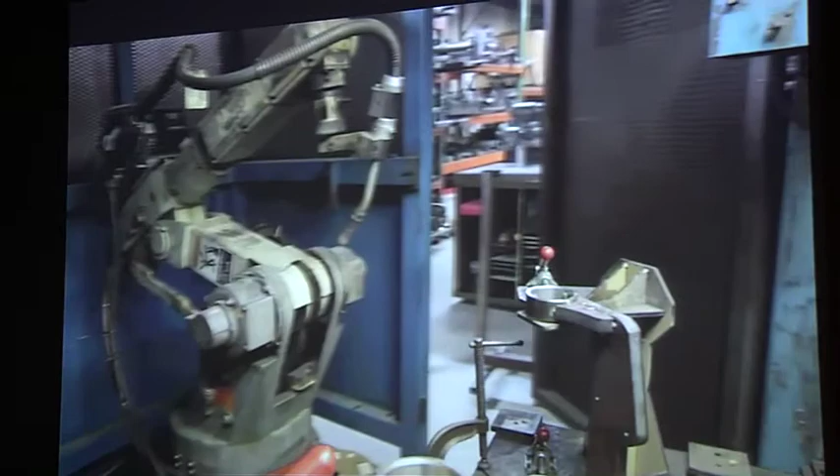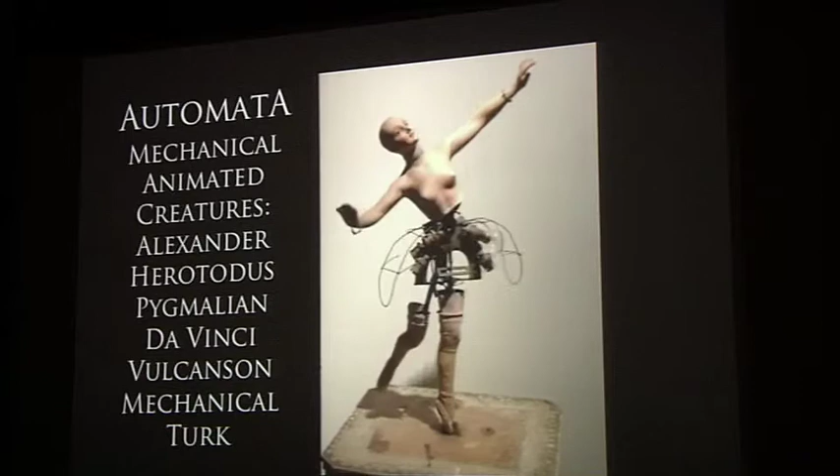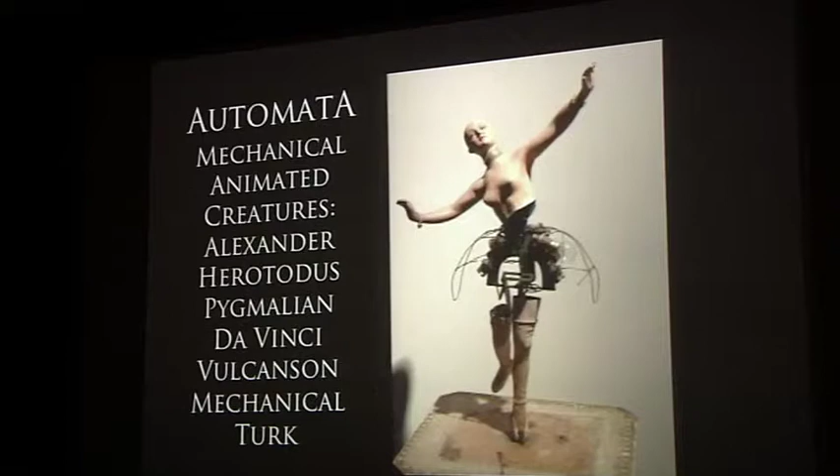Okay, great. So those are all three classes of robots, and the history of robotics goes back quite a long time. The idea of automata really goes back to the ancients, to the Egyptians, the Greeks. Da Vinci had a robot, Vulcanson, and the Mechanical Turk, a chess-playing robot, although it turned out to be a fake. So there's a long history, and what's interesting is that they're all mechanical devices, beautiful pieces of engineering involving complex systems of gears and levers and cams, basically very complex, like clockwork, to do interesting things.

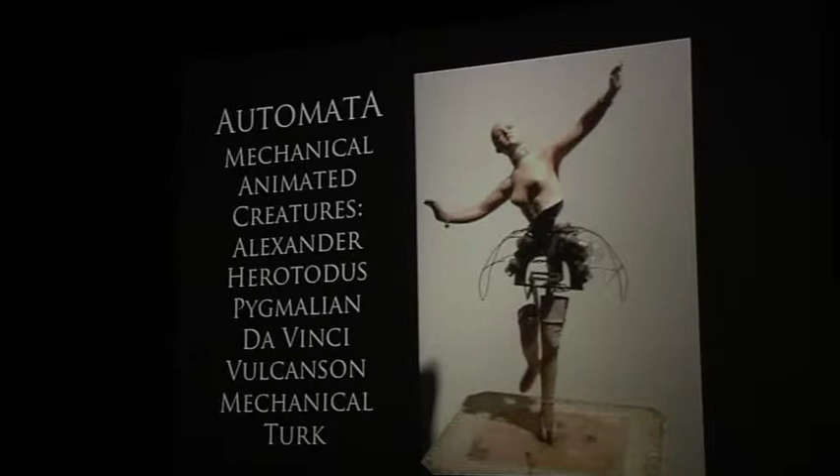One of the ideas is that it plays into this concept of hubris, that in some way to take on a godlike quality of making other beings, we're going to be punished for that. And so the idea of robots has this really complex dark history, at least in Western culture.

And the term itself, the term robot, didn't emerge until 1920, and it came out of Czechoslovakia. A Czech playwright named Karel Čapek used it in a play called Rossum's Universal Robots, RUR. And it was also in the Frankenstein category, because the robots revolted and attacked the humans.

It's interesting that the word itself comes from the Slavic root 'robota,' which also connects to the German 'Arbeit,' the word for work. It's worker, but not necessarily like having fun, off to work we go - it's kind of like forced labor. And you may recognize 'Arbeit macht frei' from the Holocaust, from the concentration camp.

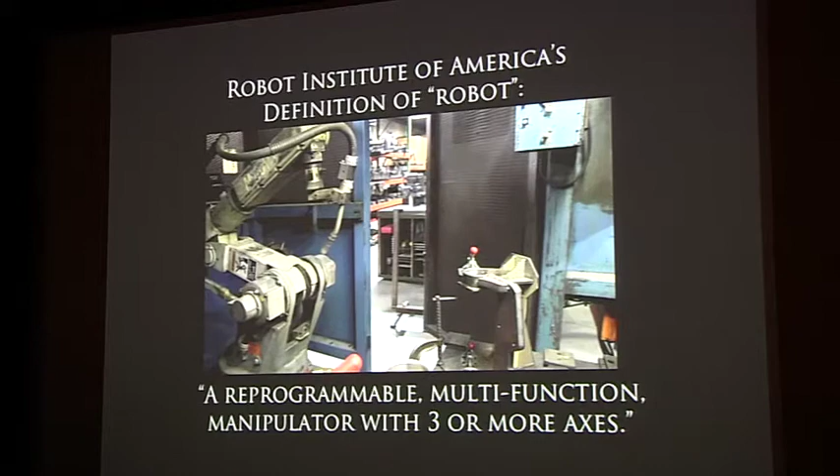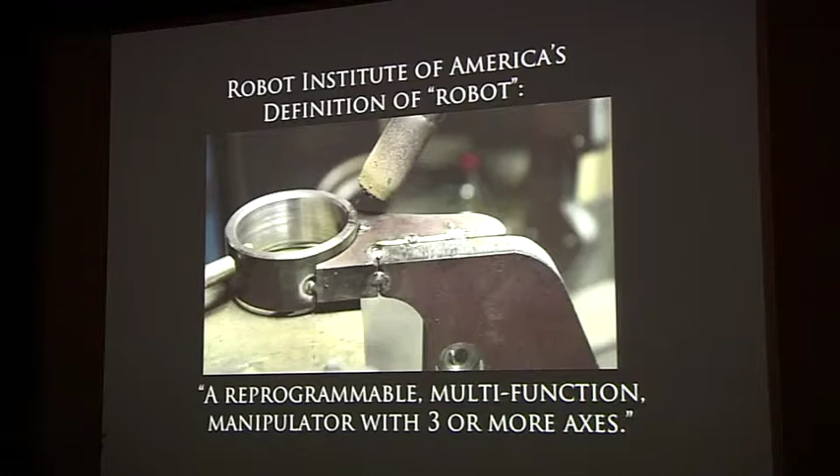Now I want to come back to the official definition of robots. If you go to certain dictionaries and look up robots, or search on the internet, you might see the definition from the Robot Institute of America. They call it a reprogrammable multifunction manipulator with 3 or more axes. They want to make a distinction from really simple things, like a traffic light or a very simple mechanism, saying it's not a robot unless it has 3 or more axes.

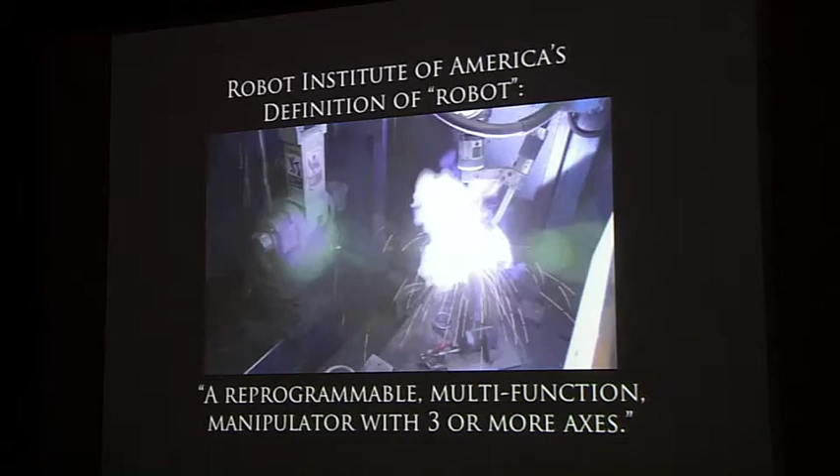But as we've been talking about, there's so much more to the definition than is captured in that. There are multiple classes of robots. One thing we talk about in research is the difference between anthropomorphic and non-anthropomorphic robots. There are many of each type out there.

The distinction we like to make is if you think about trying to build an airplane. For a long time people wanted airplanes that looked like birds, so they would flap. But it turned out the actual solution was not to follow birds exactly, but to have something not bird-like, the fixed-wing plane. Something analogous happens in robotics: maybe the best robot won't necessarily look like a human.

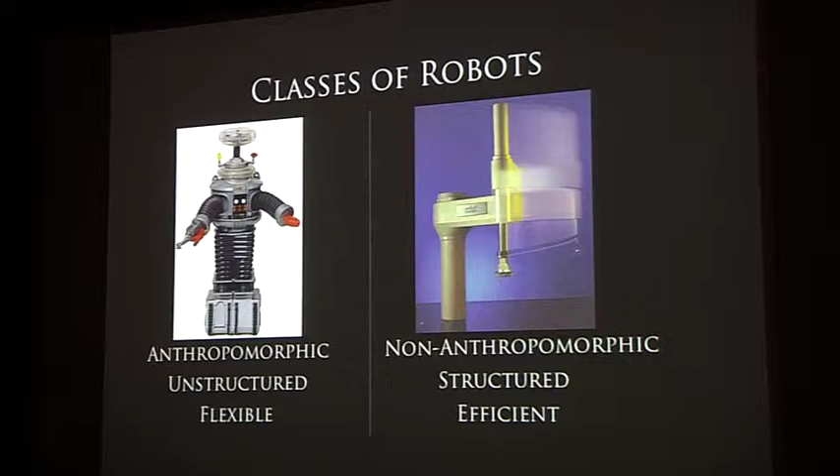The anthropomorphic type, the humanoid androids, are commonly thought of for scenarios where they're going to interact with humans, like in your house, what we call unstructured environments, where we don't know what's going to happen. The other kind is very good for structured environments like factories. On the left side there's an emphasis on flexibility, and on the right side the emphasis is on efficiency.

In the field of robotics there's lots of work going on. If you're interested, we can talk afterward, there are research groups all over the world. I'm very involved with the IEEE Robotics and Automation Society, which has about 6,000 members worldwide, hosts a number of events and conferences, and publishes journals and a magazine covering all these different areas.

What's also interesting about robotics is it's a highly interdisciplinary field. We have people from computer science, mechanical engineering, and industrial engineering all working together. Some of the topics involve a lot of math and theory, because robots are really the intersection between the world of computers, which is digital, and the physical world, which is analog. Robots have to bridge that, requiring techniques from many different areas.

There are a number of different exciting research areas, and this is just a few of them. At the last conference we had over 1,000 papers in over 100 different sessions. There's a lot going on, and I'll try to touch on some of that afterwards.

So now I'm going to stop.

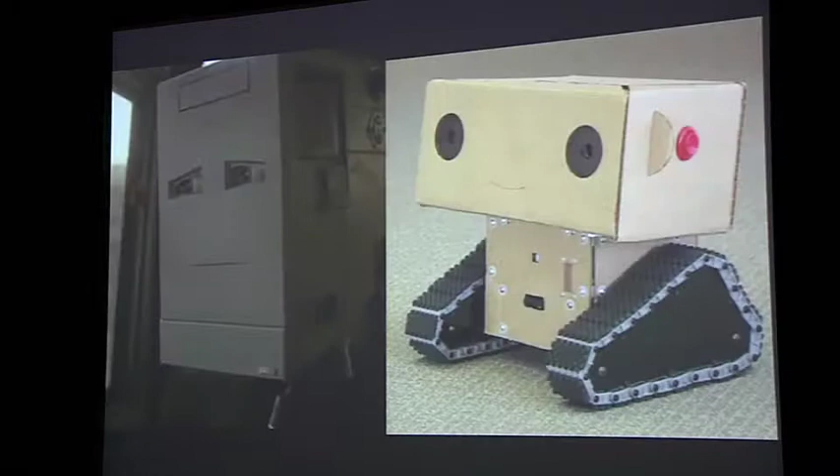This is a project that comes out of the MIT Media Lab. It's called Boxy, so it's a real robot on the right. But notice it has a very nice resemblance to our hero, Sheldon. I'm going to show you a quick video about what Boxy is all about.

I need help. If you can help me, press the red button on the side of my head.

The project is Boxy. It's an agent that we put out to try to gather stories about a particular environment autonomously. That is, we send it out in the beginning of the day, hope that it will find people, and then ask them questions and find out about the environment.

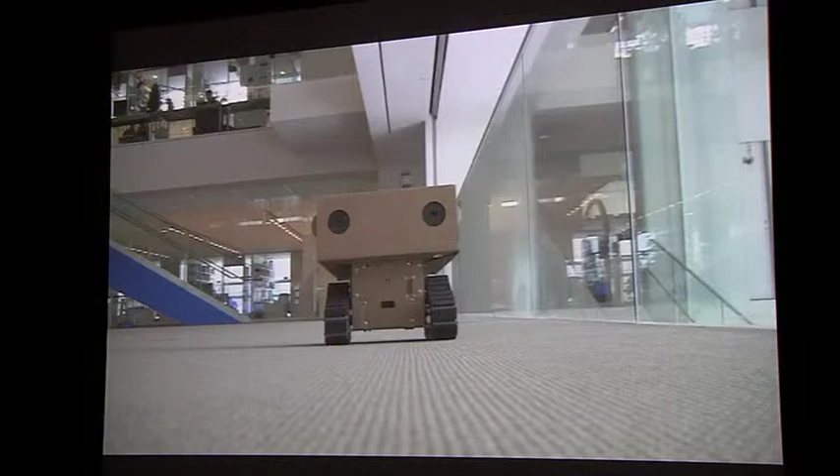Hi, my name is Boxy. I'm from the Media Lab and I'm making a movie about MIT. On the side of my head are buttons, so you can give me instructions if you would like to be part of the movie.

Actually, what I just want to say really quickly about that is Boxy is a robot, but it's designed to be a robot that's very empathetic, that people will be empathetic to. So they'll talk to it, they'll start to interact with it, and then it's there to collect video, and people pick it up and move it around. And it's part of his master's thesis.

So it's a beautiful piece of actual engineering and science that came out of a very independent source. I don't think that Alexander Reben knew about this film, and I don't think Spike Jonze knew about Alexander Reben. I think they were independent, but they both were thinking along similar lines, if that was a robot that you could empathize with.

Okay, so now I want to talk about the scene in the film when the woman yells at him and says, 'You can't drive.' Remember that? When he's at the bus stop and she says, 'You can't drive,' that classic woman, 'You can't drive.'

But how many of you know about the Google project, Google car? There's actually a very active research project to do exactly this. Actually, it's been going on for 20 years or more. People have been trying to get robots to drive on highways and streets.

What's particularly interesting about this project, Google's version, which is very successful actually, is that it makes use of the internet. It makes use of vast amounts of data on roads, a lot of which is available online, and then uses that and integrates that when it makes decisions. So when it's driving around, it's not just looking out cold, it has maps and GPS and vast amounts of information that it's bringing to bear to help it drive accurately.

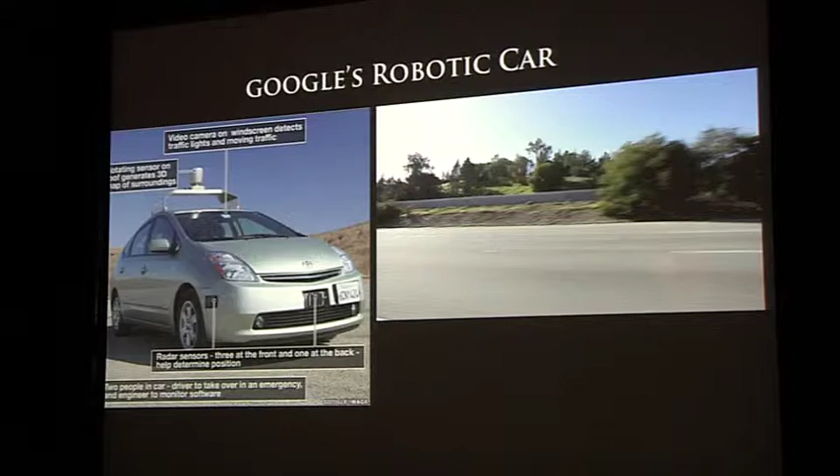So this is a subset of what I call cloud robotics, and it's a very exciting new sub-area. There's a nice quote I just heard about the car project, this Google car project, and it was Brad Templeton said, 'A robot will be truly autonomous when you instruct it to go to work and it decides to go to the beach instead.'

So I like that. But the bigger part of this, and I'll talk about for about 10 more minutes now, is called cloud robotics. There's groups at Google and in Europe, a number of researchers are looking into this. And here's the idea: the cloud being the internet. How do we start to think about the cloud as a resource for robots?

As Steve Cousins, who's a CEO of a robot company, said, the way to think about this in a nutshell is no robot is an island. For many years in robotics, we've been building these autonomous creatures that were self-contained. They had processors and everything else, but we're just now starting to realize, wait a second, the robot doesn't have to do all the computing on board. It can actually make use of this vast resource that we all use.

So let's say we want to do something like this. You know, you've seen the Roomba, the most successful robot ever—5 million Roombas have been sold. They do something very well, which is sweep the floor. But what if we wanted to go a step further? We want to have Roombas go and actually do more chores around the house, like actually pick things up, tidy up a room. Well, then it gets more complicated because you really have to do lots more sensing and decision making, so things get tricky.

So it turns out that we can start thinking about the cloud as a resource. The web is very powerful because people are putting up all kinds of information. They're volunteering information. They're helping us by putting up vast amounts of images and databases and tagging images.

Without going into all the detail, this is a representation of all the uncertainty in the edges and vertices of the part, and these are different approach directions that the gripper can take and their probability of success. I'll give you a little bit of a description of this - there's a paper being published in May that we're presenting on this project.

How many science geeks do we have out here? How many people are really into the science part? Okay, came here for the science. Good, alright, so I want to make sure I give you something too.

So here's the idea: there are Gaussian distributions around each of the vertices and the center of mass. That's a representation of our uncertainty.

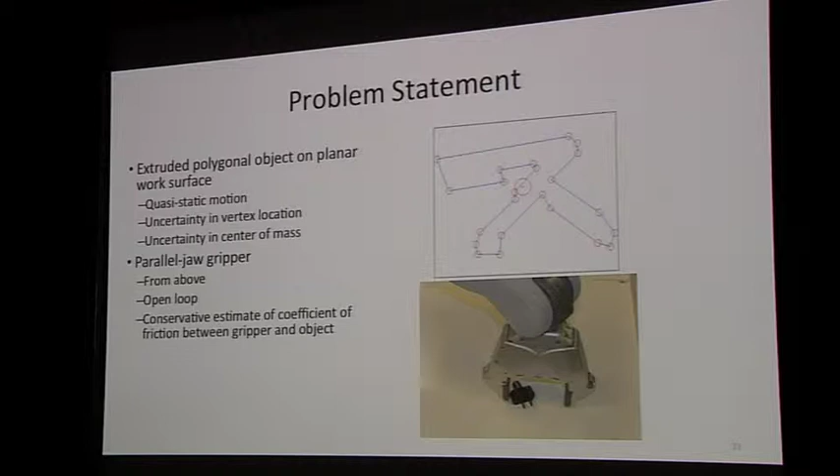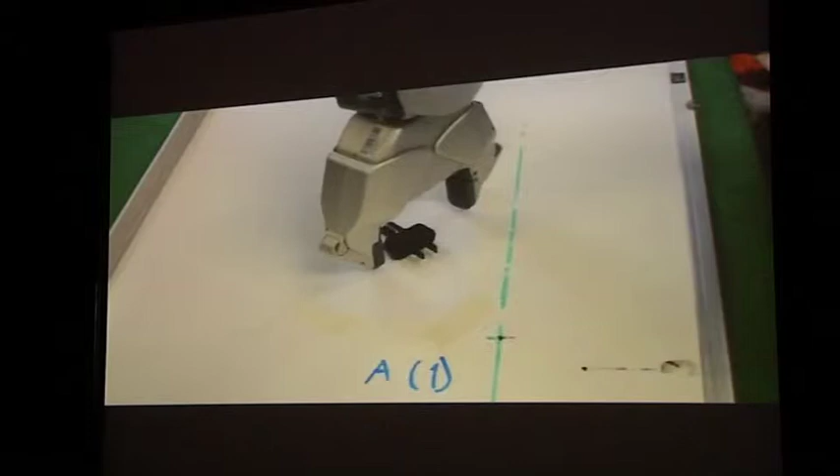Then what we want to do is basically compute a grip. We're going to use a simple grip called the parallel jaw gripper, very common - two jaws that push the part and then close around it, in that sequence as you see there. We want to compute the optimal pushing direction and closing direction for the grippers. Here's an example of what it looks like on a robot in our lab, pushing and closing around this part.

It turns out we can characterize the success of a particular grasp direction and approach direction geometrically. We can look at the properties of its friction and its torques, and basically what's called the force closure - whether we will successfully grasp the part. We can represent this mechanically as a point in this configuration space. Then what we want to do is check for all kinds of different possible approach directions.

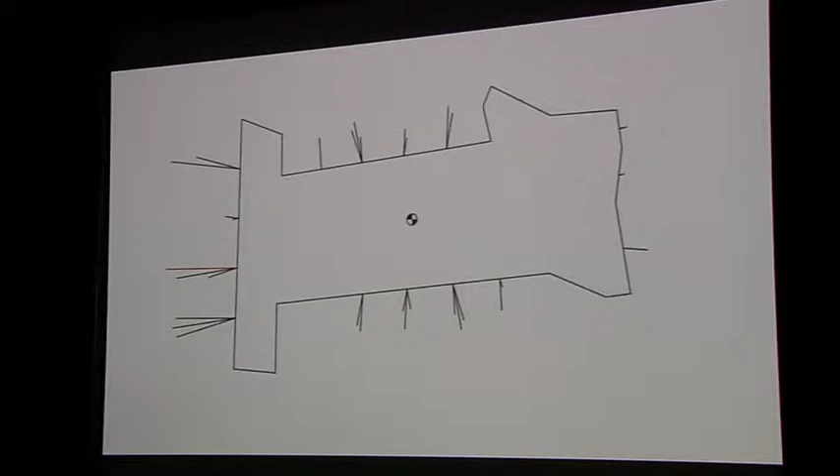We check that against samples of what the part shape might really be. The problem is there are a lot of samples, so that's where the cloud comes in, because we want to do this in parallel. We take one example, send it out to the cloud where thousands of computers can all process it in parallel. Each one sends their report, and we add those up to come up with an estimated probability, or lower bound on the probability of success, for a particular approach direction. This is the result - it's been computed for a number of shapes.

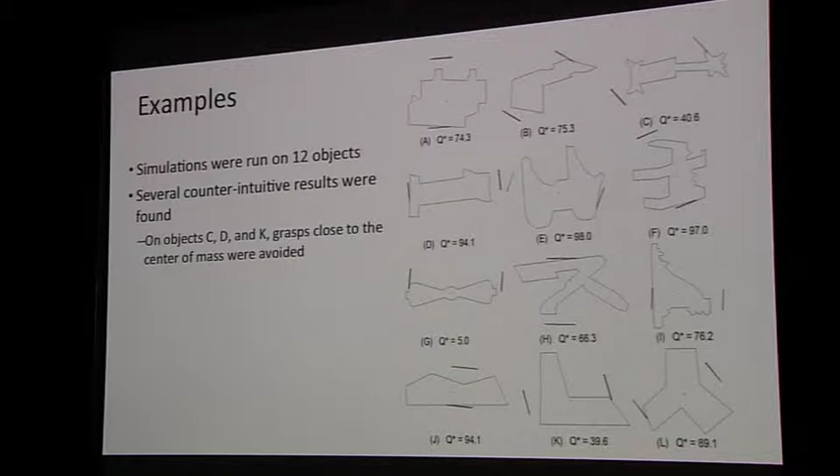The shapes that you see on the right are brackets. They're kind of weird shapes, so it's not obvious where to grasp them, especially with the uncertainty. What you see in bold on each one is the result of what this algorithm computed for the ideal grasp direction. Q is the lower bound of the probability of success over all those different perturbations. For example, these three grasps on the bottom all look pretty reasonable to me, like they'd all be good. But it turns out that when we did the analysis, the first and last are actually fairly good, but the middle one is very bad. It has a very low probability of success, because of how it will respond to the center of mass as it gets pushed.

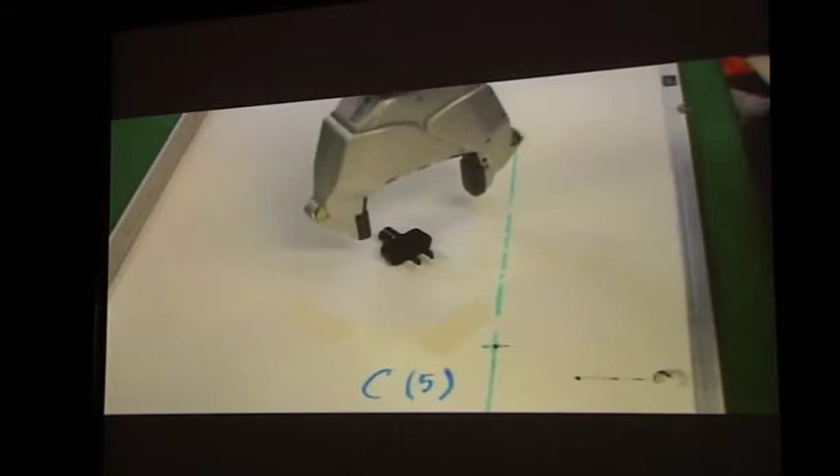So we did an experiment with that last one, and exactly as predicted, it doesn't succeed. It's interesting that we can come up with counterintuitive results, that the computer actually does things that logically analyzes this and finds something that we wouldn't have intuitively figured out.

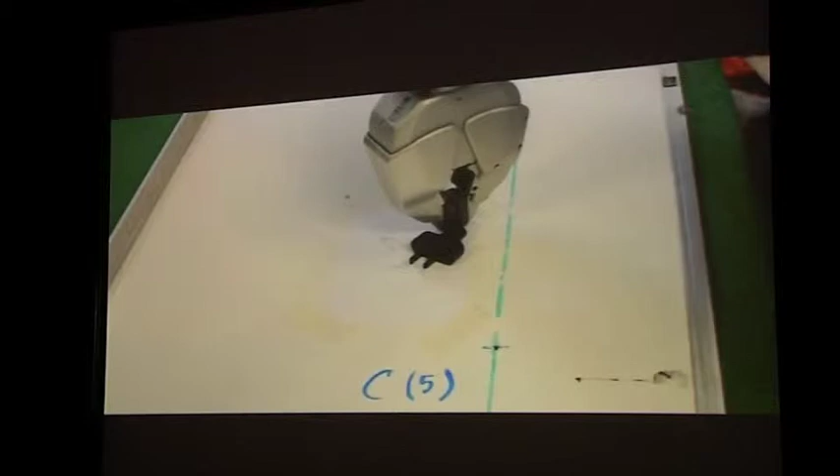So the idea is that we can do this computation in the cloud, in parallel, and then do vast amounts of these very quickly.

Let's go. All right, so the idea is, let's use the cloud as a great resource for computing.

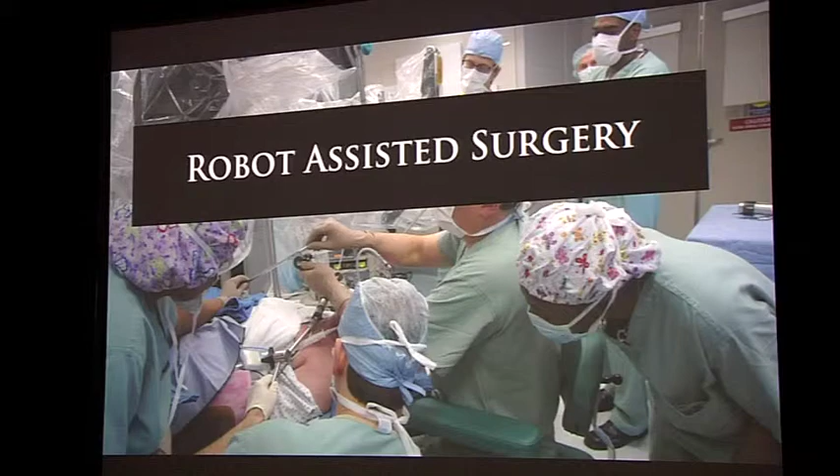Now let's go back to another scene from the movie, near the end, which is the surgery. I want to talk next about robot-assisted surgery. This is a very big area right now, enormously important. One of the projects I'm working on is with University of California San Francisco, where they're doing radiation oncology. Here's an illustration of the technique.

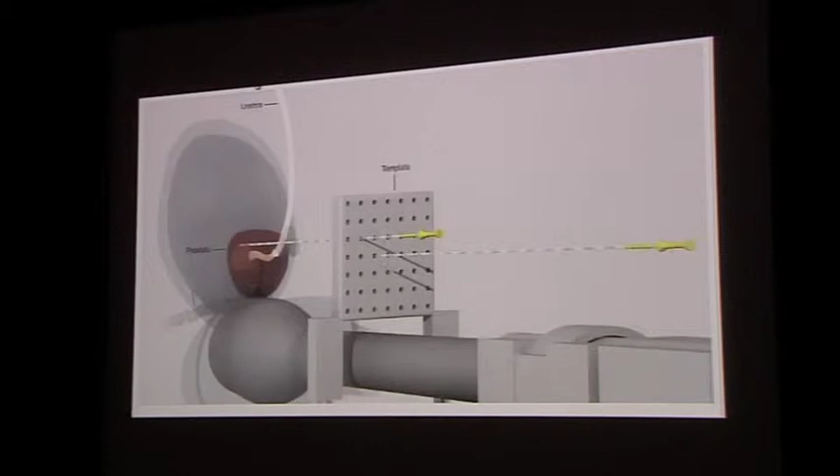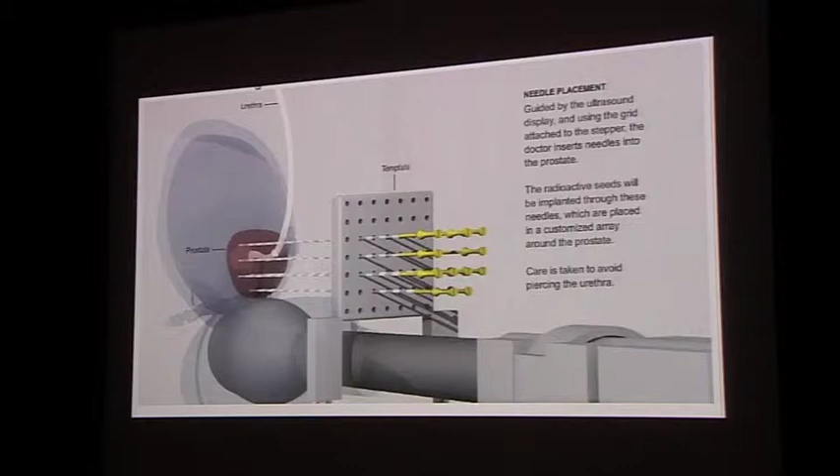When you have a cancerous tumor, there's a technique called brachytherapy. The idea is that they put these needles in parallel into the body, then insert radioactive seeds through the needles into the tumor. The seeds stay there and decay, killing the tumor and hopefully sparing the healthy tissue.

But one of the big problems is that the arrangement, the template they've been using for the last 20 years, forces all the needles to be parallel. So what happens is there may be an organ in the way, and you have to jam right through it. It turns out that for the prostate, which is what this is commonly used for, there are some organs you don't really want needles going through. That causes all kinds of side effects.

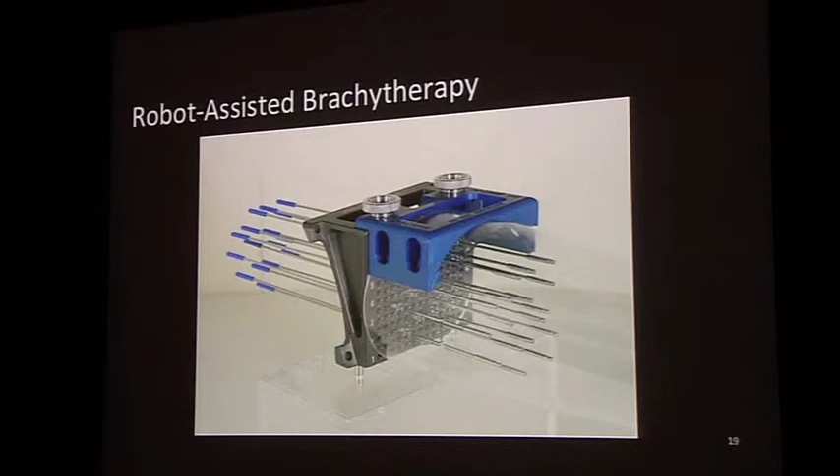So we started talking with the surgeons and doctors there, and they said what we really want is to have needles coming in from different angles so we can avoid the sensitive organs. Here's what that might look like—notice the needles are not parallel anymore. They're called skew arrangements, skew lines, non-parallel linear segments.

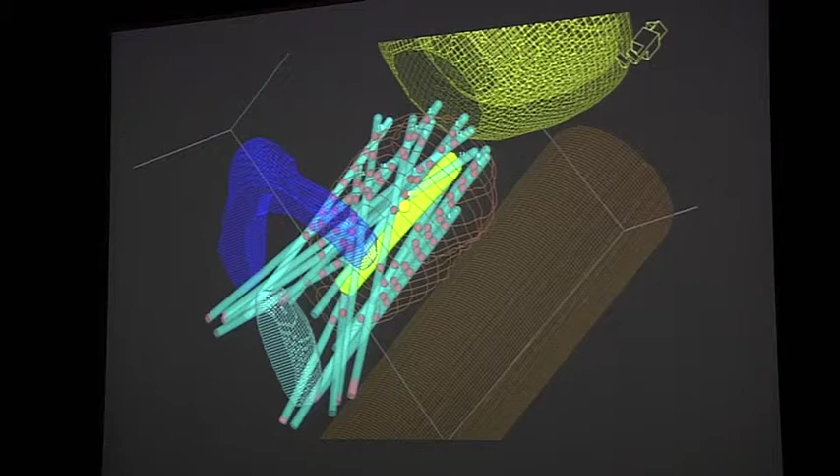Now it's tricky because how is the surgeon going to get those in at the precise positions and orientations? This is where a robot comes in, because we can have a robot help guide the needles and avoid the delicate organs but still reach the target to kill the tumor. There's a lot of related work—other people have been looking into this from different perspectives.

But we have a new algorithm that just got published—actually, it's under review by Medical Physics—for computing the optimal arrangement of needles. It turns out that's a computationally hard problem to solve. But one of my students figured out a very nice approach to it that's showing a lot of promise in computing these very quickly.

So you can see here that we use these conical arrangements. Instead of only parallel, he also introduces conical arrangements, which can avoid the delicate organs that are at the base.

And what he's been able to show is that this allows us to not only avoid the delicate organs, but also reduce the number of needles that you need. So typically before you'd use about 16 needles, but we've been able to show that you can actually reduce the number of needles lower. Now you sacrifice something in terms of robustness. So this is something we're investigating, but basically it's a very positive idea that we can compute things that are better than the treatment that's being done now, and avoid the sensitive tissues.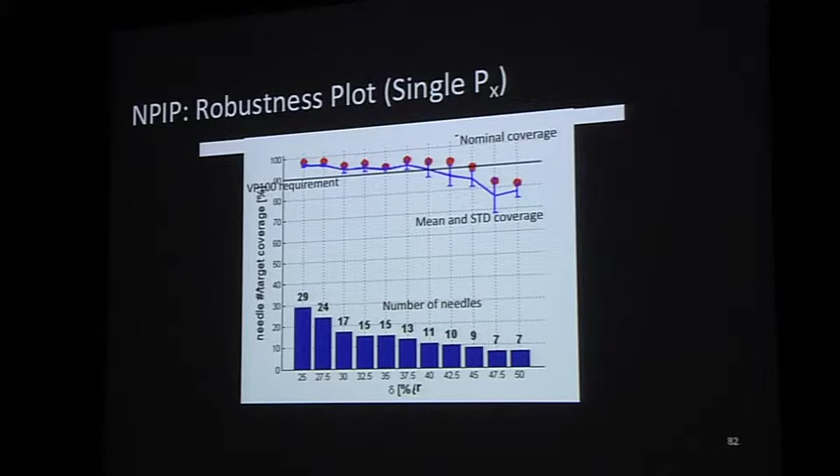So then we did an experiment. These are some of the experiments that show that with the skew arrangement, here's with 16 needles, but we can completely avoid intersecting with the delicate tissues.

And then this is a flow of how the process works, how we take the data, we build a CAD model, a CT model of the organs, then we compute the optimal arrangement, and then we have to execute that arrangement. We have to do the delivery, and that's what the robot part is.

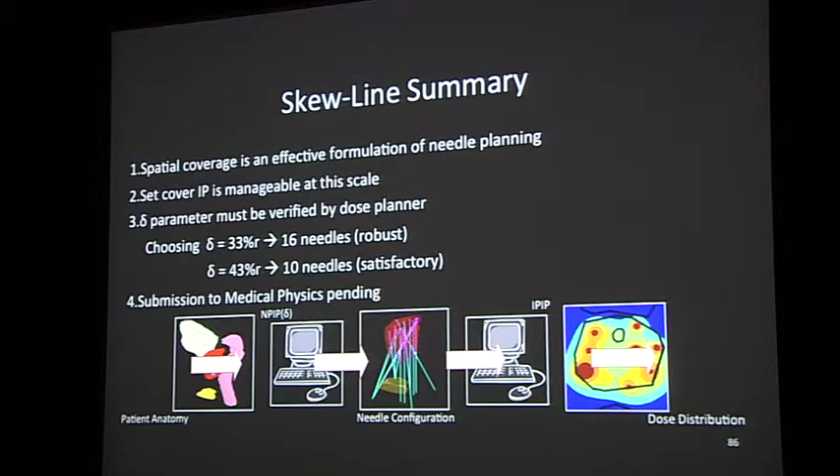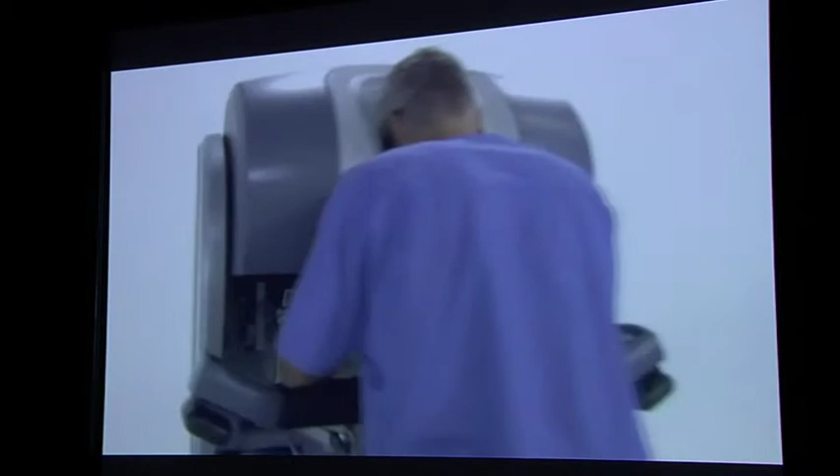Good. All right, so that's one project. The other one has to do with the Da Vinci. How many of you know about the Da Vinci surgical robots?

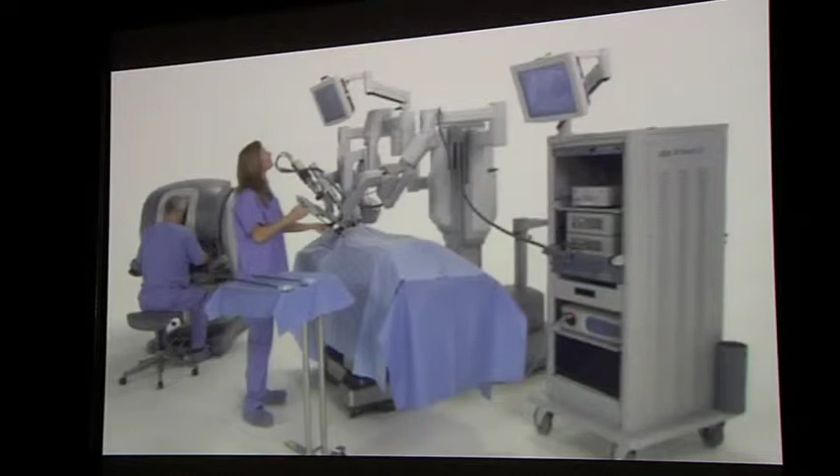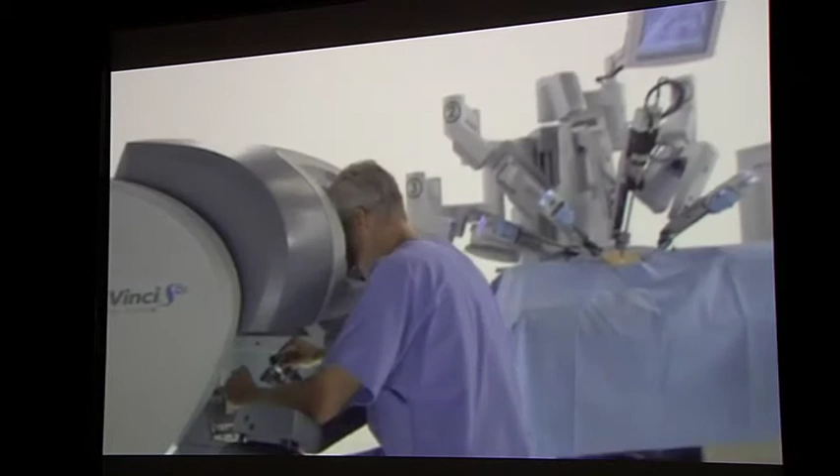Seen those around? Yeah, so these are incredibly successful. They're in use now in over 2,000 hospitals around the world, and they're used for many different procedures—gallbladder, prostate. My daughter here had her appendix taken out with one of these systems.

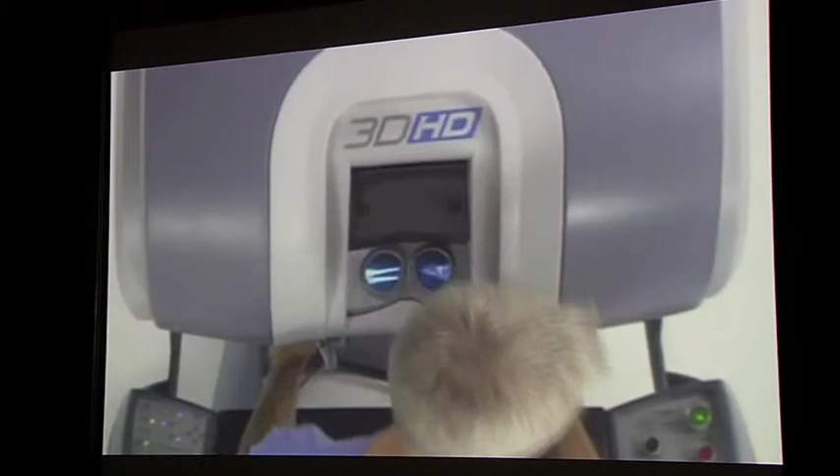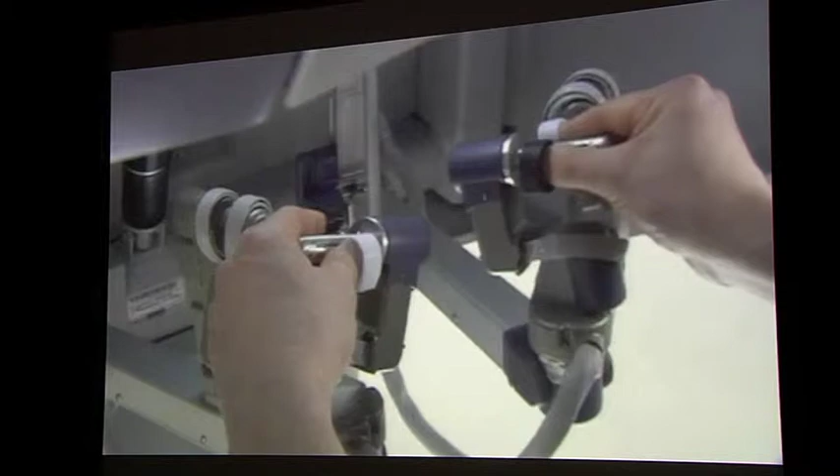So the Da Vinci is a very powerful system, and the idea of it is that it's set up to precisely allow the surgeon to work comfortably over here, and then the robot repeats the motions inside the body. But the limitation is that right now it's just in a pure master-slave mode. So the human is doing the controlling, and the robot is following. But the robot isn't doing anything on its own.

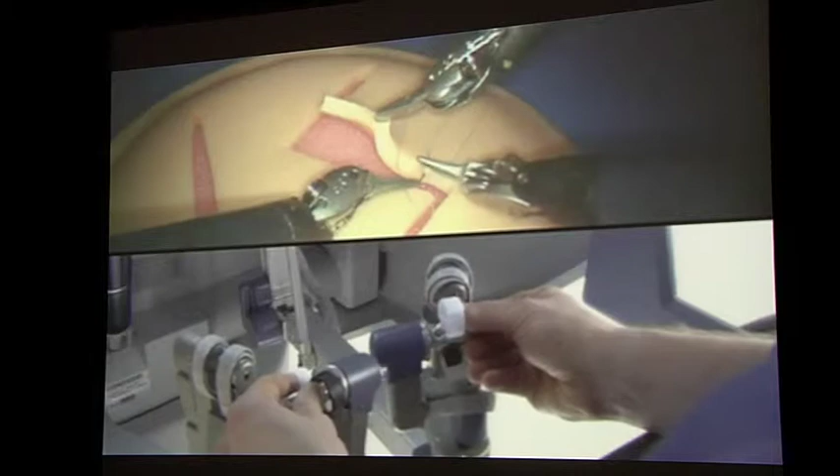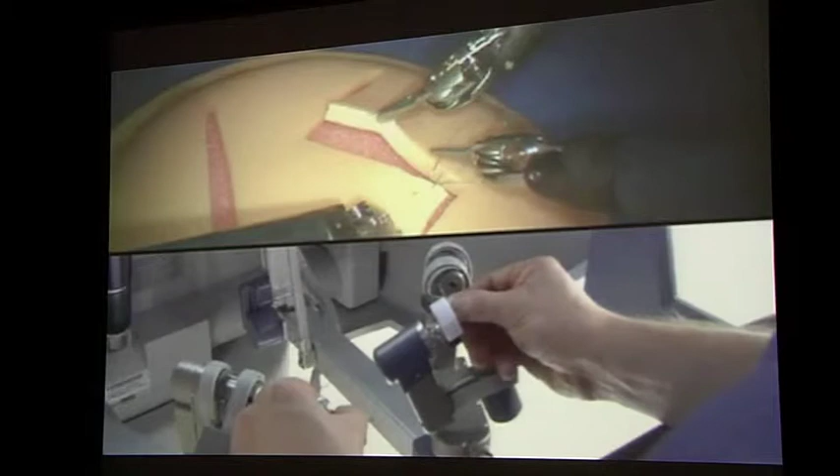So we started wondering if it would be interesting for some of these tasks—what if we could let the robot do those on its own? Not the whole surgery, because it's very complex, and I don't think we're going to replace the human surgeon completely. But there's some subtasks that are very tedious, like suturing, that we could imagine the robot could do on its own. So in order to do that, what we want to do is have something like this.

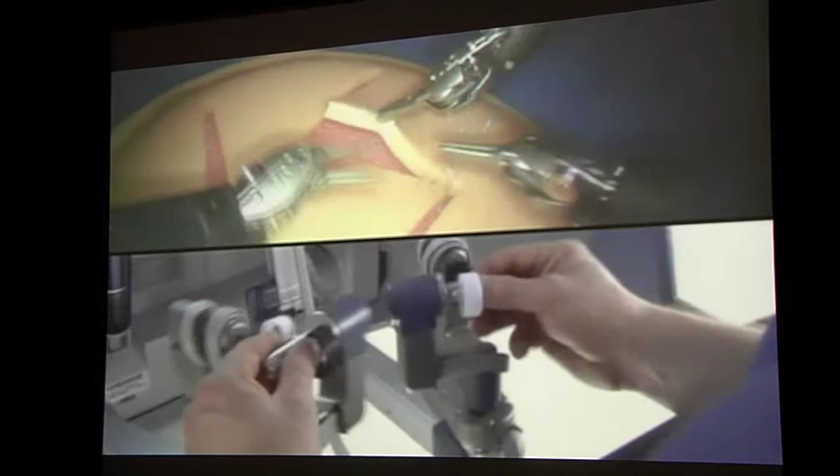We want to program the robot to do what you see on the top. Well, it turns out it's really hard, because you're dealing with tissue and complex motions, and it's very difficult.

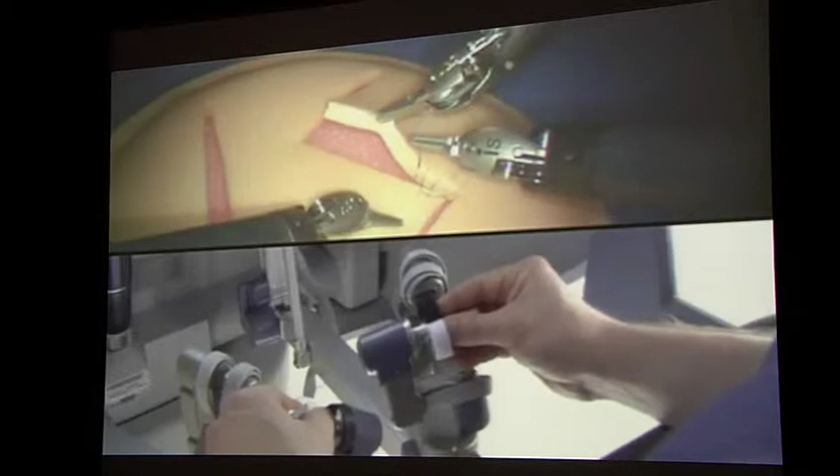So it turns out there was a colleague who had been working on robot learning—that is, having a human train the robot to do a complex task like this. So here's the idea: imagine we want the robot to perform a figure eight, just as an illustration.

What we do is ask the human to control the robot to perform a figure eight. So this is exactly what you see on the bottom—the human is controlling the robot. The result is much better than what an amateur like me could do, because they're experts. But still, it's kind of imprecise and jerky.

So what we do is take those examples, the demonstrations we recorded, and process them. First of all, we time align them, because some are slightly longer or shorter than others. So we use a technique from speech recognition called dynamic time warping, and what that does is allow you to line up all the examples together.

And then we apply a technique called Kalman smoothing that allows us to take all the examples and infer an optimal underlying trajectory beneath them, where it basically treats all of the examples as noisy observations of an underlying control trajectory. So we take those noisy observations, and this is what we compute—this is what the software has analyzed to compute.

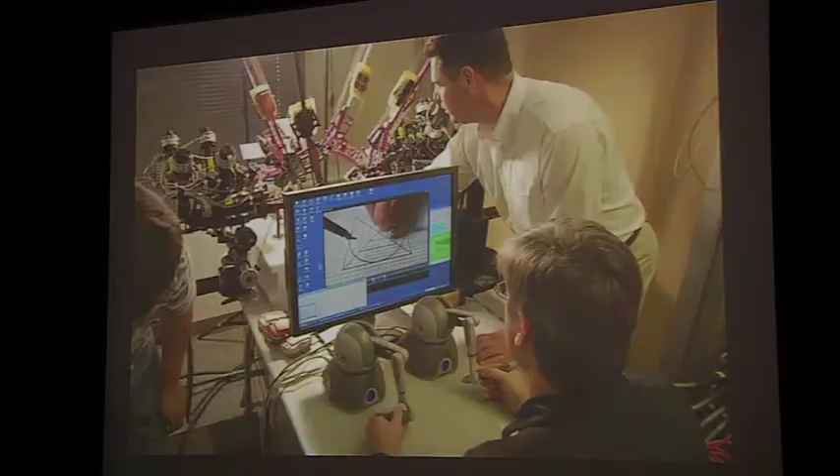There are very exciting possibilities with this. I'll show you what it looks like with a system we're now working with. We just got a piece of hardware called the Raven, which is like the Da Vinci but completely open source, so we have complete access to all aspects of the system. We just got this from a National Science Foundation grant from the University of Washington.

Here's some initial experiments - this is the surgeon operating it, with the idea to touch 4 corners of the box. Now we've learned it, and we're going to re-execute this at 4 times the speed of the surgeon. Here's 8 times the speed, and here's 10 times the speed. I can't show you 12 times because the cables broke at that point. But it's a really exciting thing for us right now, and now we're applying this to suturing and other scenarios.

These are examples of medical robotics, and it's a huge and growing field. It's very exciting because there's been a paradigm shift where doctors have really embraced robotics technology, and it's being used in many different aspects of medical treatment.

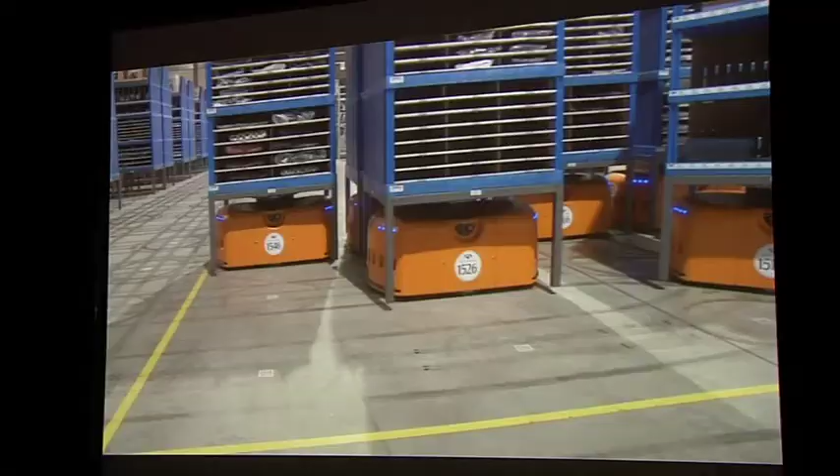It's called Kiva Systems. Kiva Systems was designed by Raf D'Andrea, a brilliant robotics designer, and these little orange things are the robots - if you look closely, they actually look a lot like Sheldon. They're just little platforms, but the beauty is that they move these racks around in a warehouse, doing logistics. The human just stands there, since humans are very good at loading, unloading, and recognizing things. Imagine it like Amazon - they have these vast warehouses, and when they get an order, they have to figure out they need this, 2 of these, 3 of these, etc. The robots help move the items to them, and they assemble and put them into boxes. It's a hybrid system with humans and robots working together, and it's very successful - they're using this in many major warehouse and logistics centers.

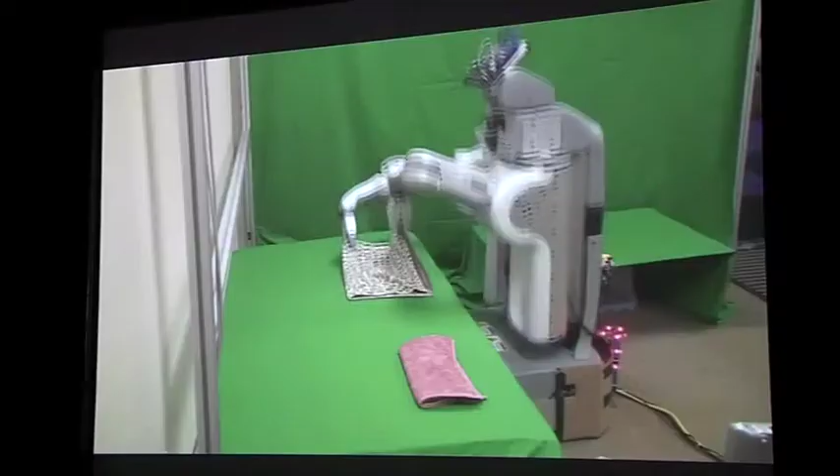This is a general example of something called service or home robotics, and we're working on it. We've got a long way to go. What's actually important about this result, which has been published in a number of journals, is that it folded 50 towels in a row without a failure. That's pretty amazing because the towels are all crumpled up, so it has to figure out how to grab the corners of the towel and rearrange it. But 50 in a row took a long...